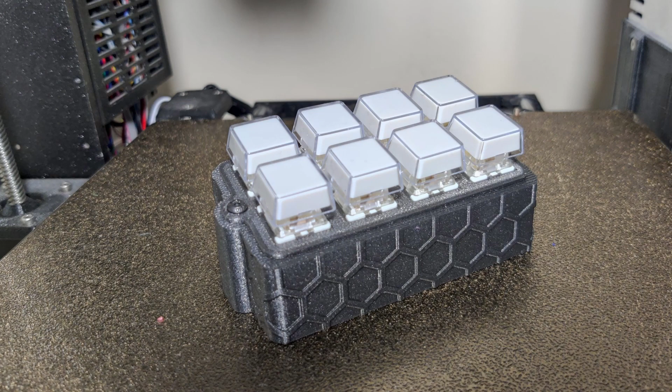Which is when I remembered that recently there was a macro keyboard project in one of the Alien 3D subscription boxes that I had not built yet. If you aren't aware of the Alien 3D box, it's an awesome monthly box that comes in a couple different varieties. I get the full Alien box, which includes 4 different filament samples, a gadget or a tool, and non-3D printed parts to be used in a 3D printing project. And typically there's one big mothership prize that is given out to a random subscriber each month.

This project was included in the September 2021 UFO box. That month, the mothership prize was a full camera. The 4 filament samples just happen to be all from VO3D. This isn't typical to have them all from the same manufacturer. The bonus accessory was a silicone magnetic soldering mat and our project, the macro keyboard.

At the bottom of the project description are 2 links, one to the modified case files that will print from Printables and another to the assembly instructions.

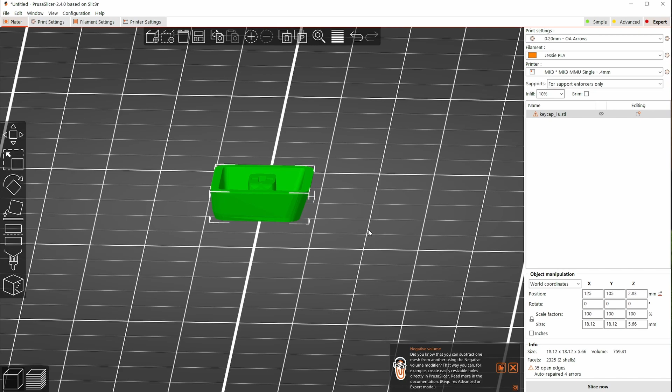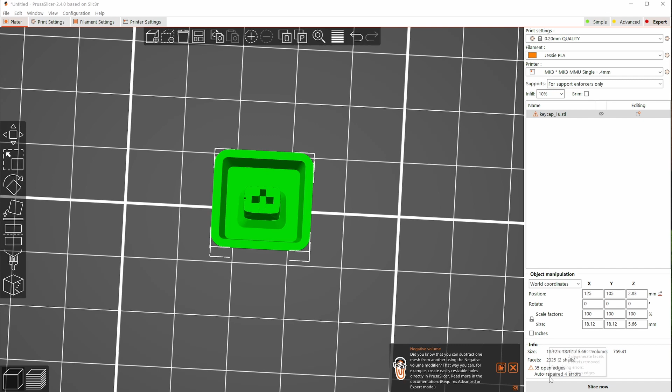Note that this keycap came in with this error over here. PrusaSlicer found 35 open edges and has gone ahead and auto-repaired them. But we can go ahead and make that a little bit more permanent by right-clicking and clicking Fix through Netfabb.

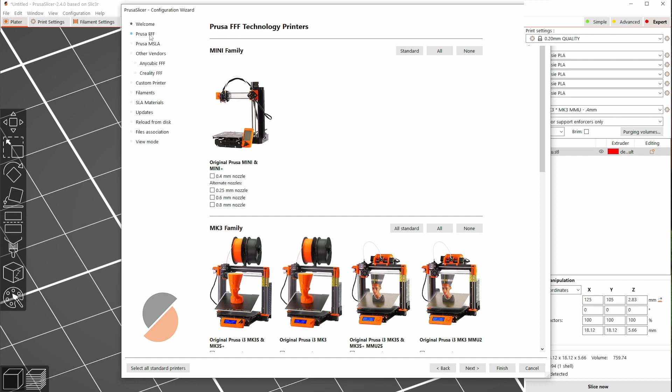I'm going to go ahead and click the printer configuration over to use the MMU2 unit. This can easily be added pre-configured from the configuration wizard inside the slicer. This is primarily because it's going to be a lot easier while we're first building these out to just go ahead and use the pre-configuration. When it comes time to print, I'll swing back around and show how to print these without an MMU on any printer that supports the M600 pause function.

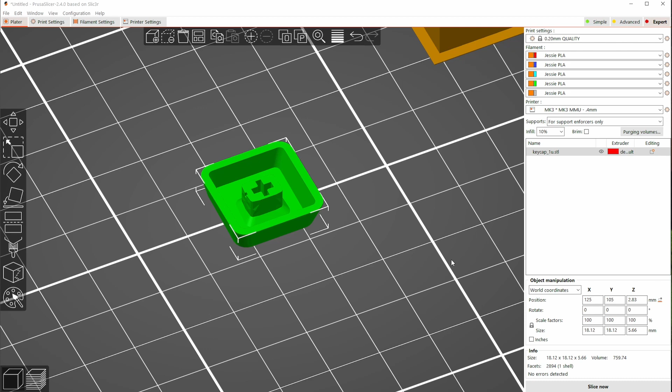Our first keycap is going to be for record. It's just going to have a circle. This one's pretty easy. We can use the add part feature to add a circle, or in this case a cylinder, to our existing keycap.

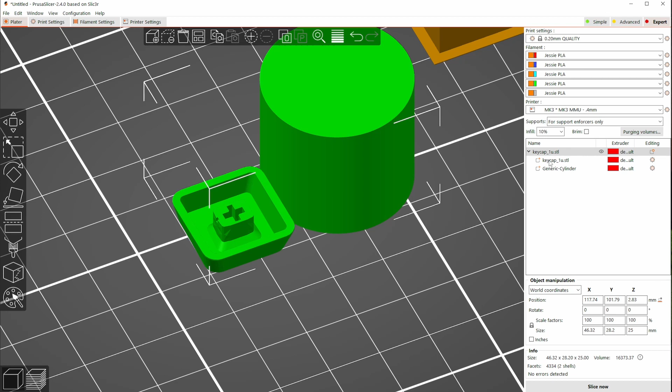Notice how it's taken the keycap and the cylinder and grouped them together. This way, when I'm working with the group, I can move them together, but I also can address each one individually. So in this case, we need to make our cylinder dramatically smaller.

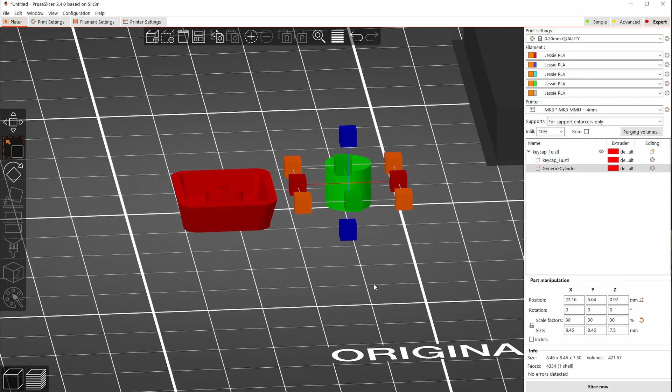When we scale things with the outer handles in PrusaSlicer, it scales from the center, so it's floating up in the air. You can use the drop to bed icon down here to drop it down and settle it on the bed. It's a lot easier to flip this over and look from the bottom side to get our sizing.

And when we look back over at the coordinate system over here, when we click on the main keycap file, that's the coordinates for the build plate. We click on the keycap file itself, that's its position relative to the group, and the same thing when we click on the cylinder. So essentially, because the keycap file is the primary file, we click on the cylinder here and we can see its relationship to that file.

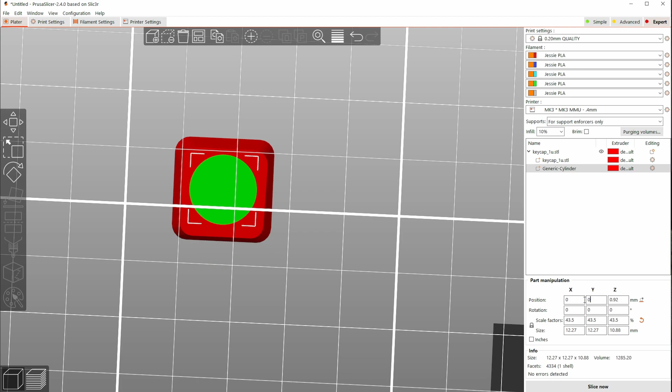So we can change our X position to 0 to center it in the X axis, and we can do the same thing for Y. Now, because we've got that flared skirt on there, it's centering to the widest point, which is not the part that we're going to see. So I'm going to move this over just a little bit so we can visually center it to the center part of the top of the keycap.

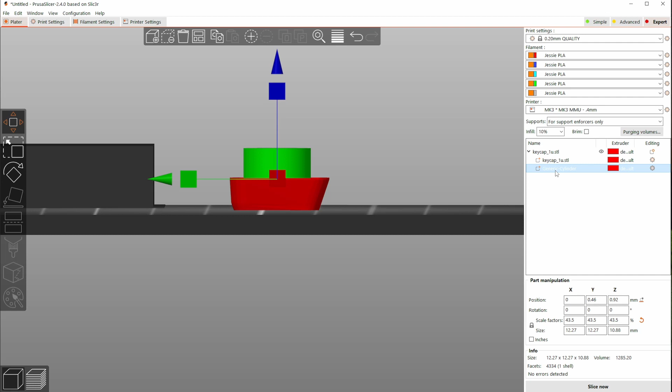Now when we move that, it actually moved our keycap up so we can drop it down to the bed. Our cylinder is still way too tall. I'm going to print these at a 0.2 millimeter layer height, and I only want to do 2 layers. So it will be 0.4 millimeters.

Notice that I forgot to unlock the scale factor, so it scaled the whole thing. We'll undo, unlock, change to 0.4, and drop to the bed.

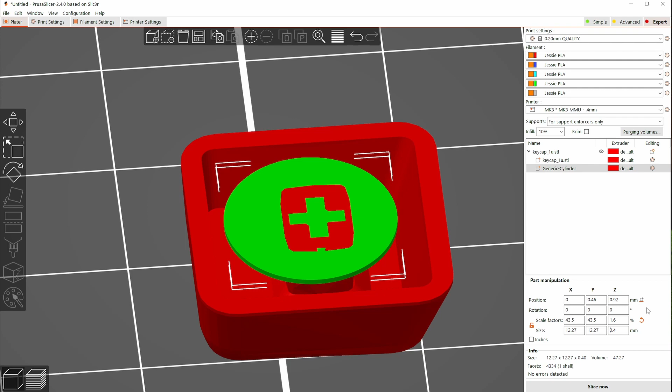Now it looks really nice until we click off of it and we realize that we're printing with the same filament. I'm going to select the cylinder and tell it to print with the second extruder.

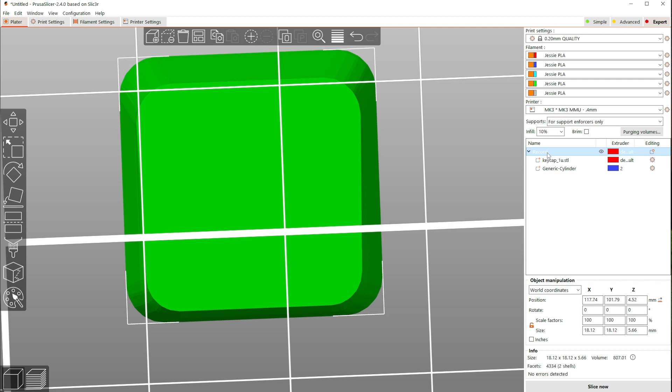Our first keycap is done. Another thing we can do in here is come over and double click on that group name and rename it so we can keep our groups separate, because we're going to have 8 keycap files in here eventually. We could copy and paste this group and delete the cylinder, but it's a little bit easier just to bring in another file.

Now notice that it's coming back with an error. So if we duplicated this group and deleted it, we wouldn't have to fix this through Netfabb.

Now I said this was going to be just done with PrusaSlicer, but I'm also going to give you another little tip here. If you happen to be working on the Windows platform, you can open up a file in the Windows 3D Builder that's built into Windows 10.

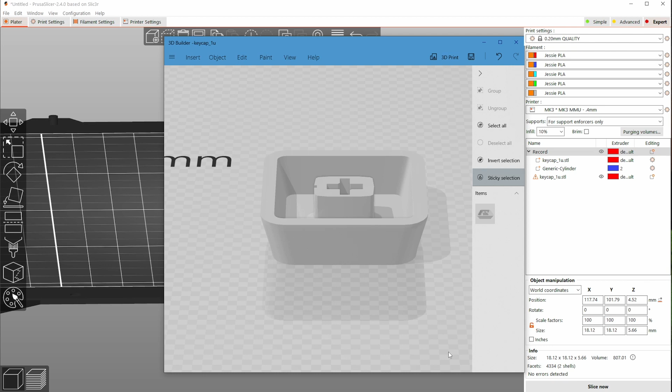Import the model, and it will find any errors and want to correct them, and then we can save our file back as an STL, and when we bring that file back in, it's fixed.

Now another option we could have done is, once we right-clicked and fixed this through Netfabb, we could have gone up underneath the file, export, and exported the plate as an STL. But we can't export an individual file.

But if we'd have brought just the keycap into PrusaSlicer, fixed it as our very first step, and then saved the plate back as an STL file, then we could have had that file come back in fixed each time.

But when I run into a situation like this, it's usually just easier for me to double click on the file inside Windows Explorer, fix it through 3D Builder, and then bring them in. It's all personal preference. If you're using a Macintosh, I'm sorry.

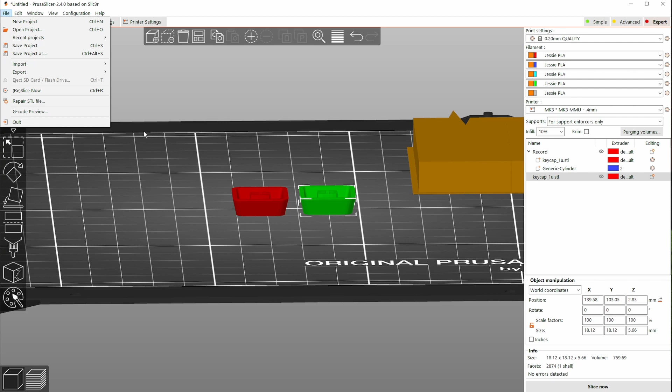I don't know any other way to fix it there. I know there's got to be some other tools, but fixing this situation through PrusaSlicer will work on all platforms, Windows, Linux, and Macintosh. Our next keycap is going to be the pause button.

Now there's several different ways we could illustrate or convey the idea of pause. I could use the cylinder and add a couple boxes to it, but I'd like to share another cool resource with you. Font Awesome is a website with awesome icons and logos as font resources for use on the web. Luckily for us, the icons are also available as SVG files.

So I'm going to search for pause. These icons come in two different varieties: free versions and pro versions that you have to pay for. For this, I'm going to use the free versions.

However, if you happen to use these icons for anything that you share with the rest of the world or you make money off of, I would highly advise that you go ahead and look at the pro versions.

I like this circle one with the bars in the middle. I'm going to go ahead and collapse this to clean things up just a hair. We can see this icon laid out in a couple different patterns and backgrounds, but we need the SVG file.

And that is at this link right here. And again, we've got some terms of service and talk about licensing, and we'll save that SVG file. Sadly, we don't have the ability to bring an SVG file directly into PrusaSlicer to work with.

So, feature request? Luckily, I found this cool website called SVG to STL that conveniently will allow us to take our SVG file, import it, and upload it, convert it.

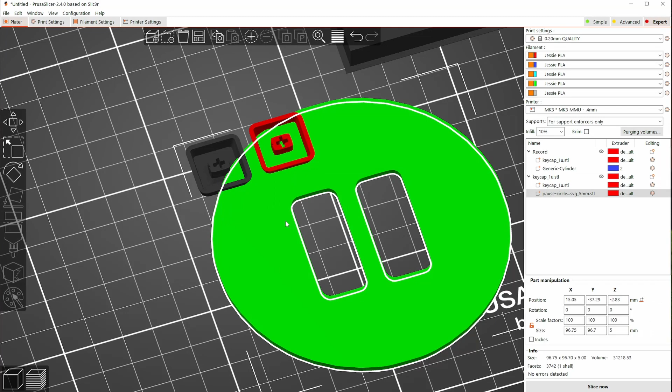Similar process as before. We're going to right click and go to add part. This time, instead of selecting a cylinder, we're going to use load. We'll grab that STL file and load it in, then scale it down and position it.

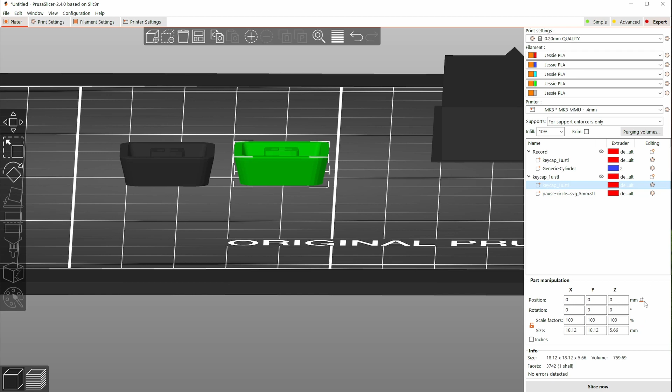For continuity, I'm going to click over and look at my other cylinder, which was 12.27, 0.4 high, drop, make sure they're down, and set to extruder 2.

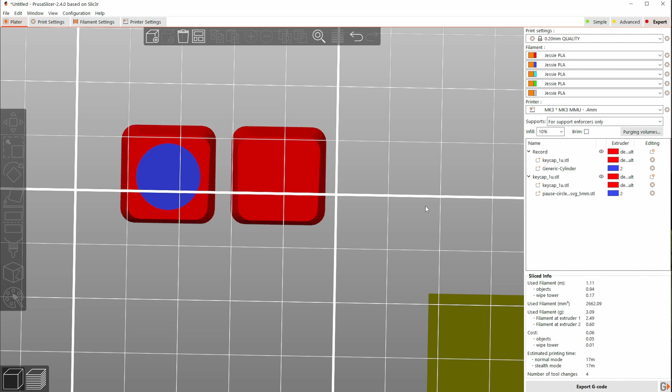Sometimes you'll see a little bit of weirdness here. I've noticed if you just slice the file, which this looks good, and kick back, sometimes it'll be all right. But we did slice it and we saw that it was all good to go. So that's just a little bit of a visual oddity there, but it is good to go.

Our third button is going to be for studio mode. Studio mode is more for live streaming, where it can be used for transitions. I haven't really done any live streaming yet, but it's something I aspire to.

So we're going to run through that same process again, and this time I'm thinking a monitor type of image will work. I think this one that says TV will be fine.

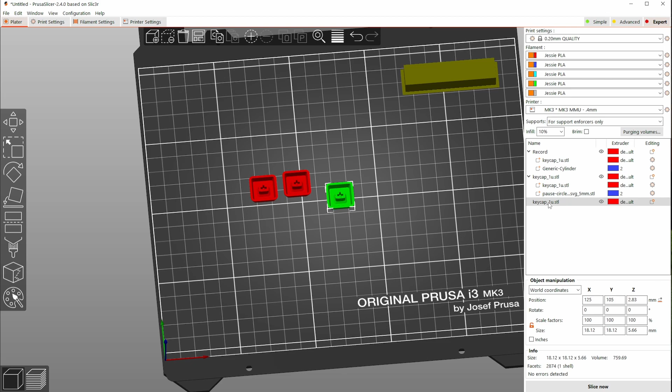I'm going to move our keycaps over out of the way a little bit, get some room, bring that file back in. Notice there's no error this time because we repaired it with 3D Builder. Same thing, we're going to add a part by loading it.

Now in the bottom row of my keys, I'm actually using this particular icon for my monitor source key. So I am going to go ahead and set this one up and then duplicate it, and we'll modify the duplicate to make our studio mode key.

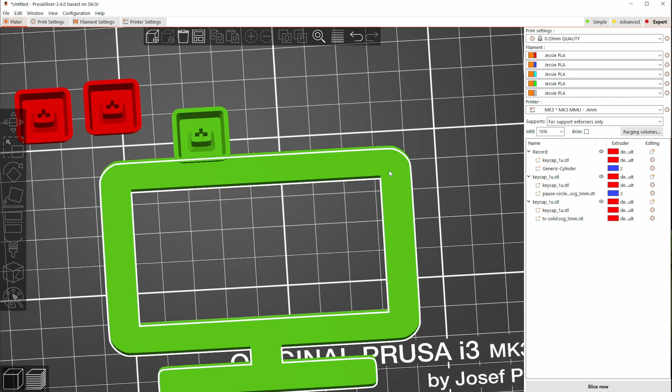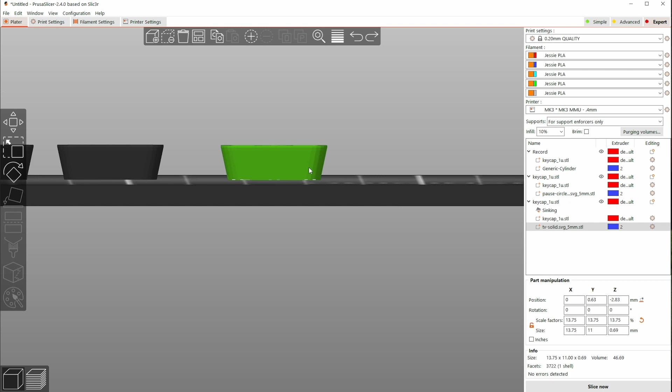And we'll set that to our second extruder as well. Before I drop this to the build plate, notice this icon right here now that says sinking. That is actually telling us that our keycap is sitting on the build plate, and part of our group, in this case the SVG STL that we just imported, is below the build plate.

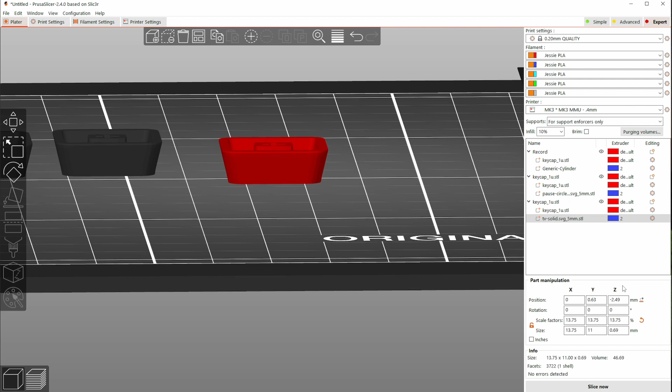This is something new in PrusaSlicer 2.4. Originally you could never drop anything below the build plate like you could in Cura. Now you can, and there's a warning telling us that that's what's happening. Dropping that TV icon to the build plate makes it go away.

We will set that to 0.4 millimeters and drop it to the build plate. Slice, and excellent. I mentioned that we're going to go ahead and use this same base icon for the studio mode and for my main screen keycap.

I could click this plus button up here and I could add another instance of it, but they're tied together. So if I alter one of them, it will alter both of them. So that's not going to work.

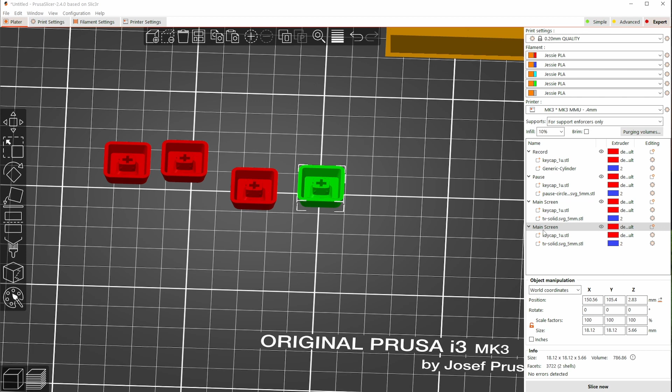What we need to do is just a regular copy and paste, and that can be a Control-C, Control-V, or we can use the icons up here in the toolbar. I'll go ahead and rename this one Studio just so we don't get them confused.

And now what we're going to do is we're going to combine the first two techniques. We already have an icon loaded, but now we need to add a box. I'm going to be efficient and go ahead and change this to 0.4 millimeters high now, get that out of the way, and change it to Extruder 2.

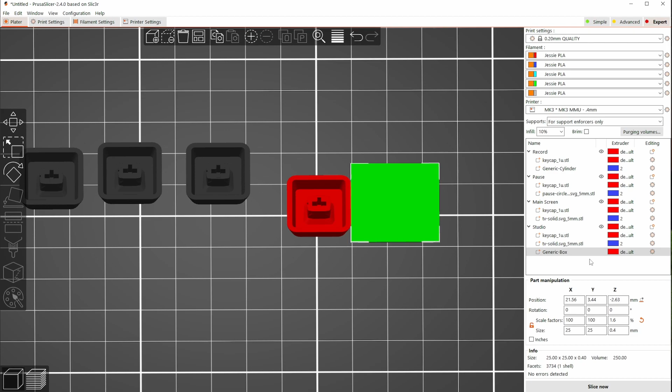So go ahead and grab that and scale it down, and I'm looking for that to be at the same width as the other parts. I think that's about right. And now we need to get our height. Oops, see, I grabbed the whole thing there. I need just the box.

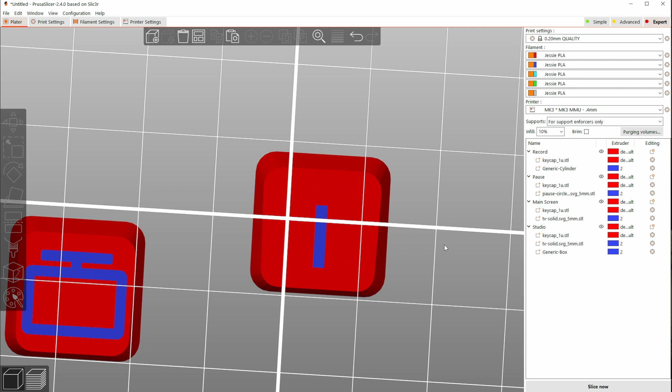I think that looks right. Let's double check. Set that box to 0. It's at 0.05, so now we're exactly there. And slice. To keep the video as short as possible, I'm going to skip showing how to do the microphone, because it's exactly the same way that we did the pause button.

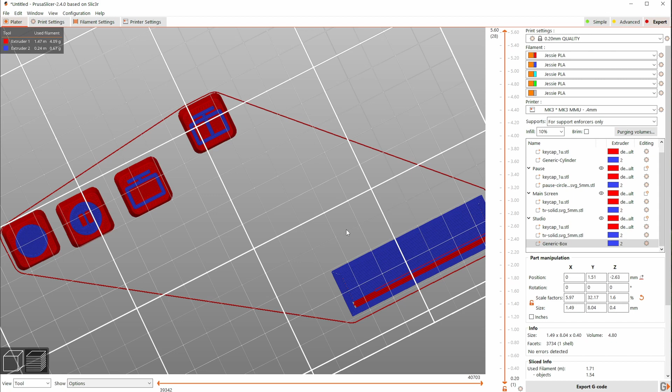I'm also going to skip showing you how I do the 7th button, which is the little popsicle person, which will be my webcam pointing directly at me. So I'm going to skip ahead and do those off camera, but then we're going to circle back and combine two different keycaps again. So now I have the 6 keycaps done, and we can go ahead and slice them and look at the preview by sliding all the way down.

See that first layer, got my microphone. For the record, when I searched on Font Awesome, this icon is called User. We can see our first layer looks good, our second layer looks good, and then our third layer is solid red. So that means all of our icons are 0.4 millimeters high.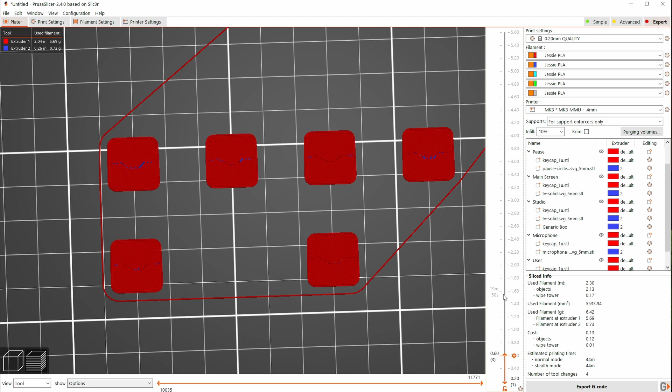Now we're going to take care of this 6th icon, which is my webcam inset in the bottom right hand corner of my primary monitor. To do that, we're going to combine these two icons right here.

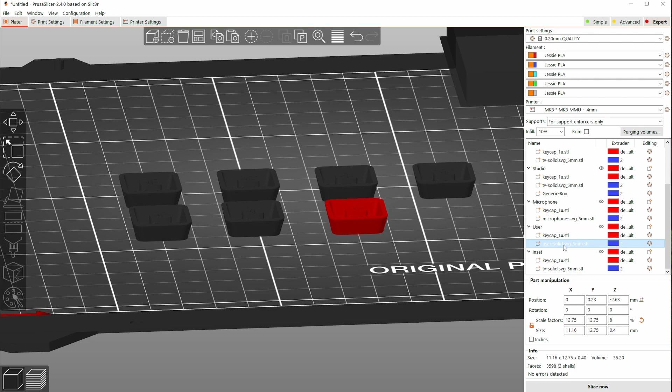So I'm going to copy and paste my main screen, I call it Inset. Then I'm going to go over to my user. I'm going to copy just that STL. Then click on my Inset and hit paste. And that drops it into that same grouping.

When we slice, we can see they're together. Of course, my user icon is too large, so we're going to have to scale it down.

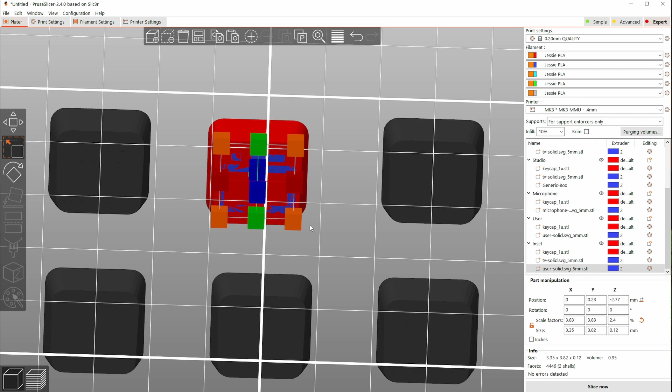There we go, so we'll take a look at all of them. Those look great. Now for our final one, this is going to be for an auxiliary camera, for example something like one mounted overhead and pointing down.

It's going to use the same process that we just used, taking 3 separate STL files and combining them together. But there's going to be a slight twist. Let me put this together for you real fast and I'll show you.

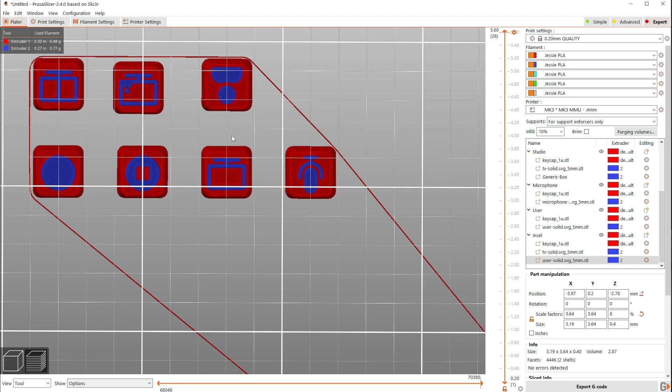I've gone ahead and assembled all the parts of this keycap now. We've got the keycap, we've got a down-facing arrow, and I've got my camera. However, I still have them all set to the default extruder so we can illustrate something. The order in which things are placed is important.

I want the camera part to print in a different color and the arrow to print in the same color as the keycap, much like a similar combination that we have now. So I'm going to change that to extruder 2. It looks good here in my preview, so if we slice the file, we can see that the arrow is not being rendered. So let's change the order.

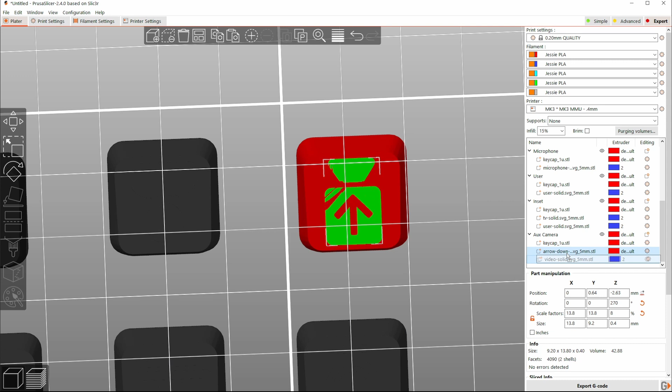Put the arrow below and the video on top. And now when we slice, we'll see that that arrow is where we want it to be.

So if we look at the order in which things are stacked, you can see that it's kind of a bottom-up stacking order. The arrow is the lowest thing in our list, so it's got precedent, and then the video camera, and then the keycap. So when you're putting multiple things together, just be mindful of the order that they're in, just in case you get a result that you're not expecting.

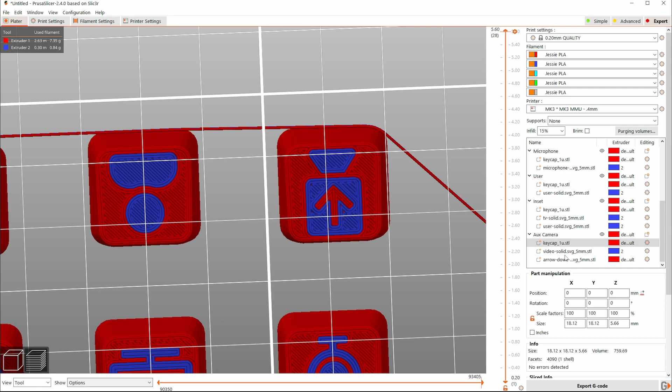Scroll out here and take a look. Here's our first layer, our second layer, and then our third layer, and everything prints on up from there.

The slicer is already set up to go ahead and use the MMU on my MK3. But let's go ahead and take a look at a couple little things here.

We can see up in the top left corner and down here in the bottom right that we can see how much material is going to be used, how much material is going to go into the wipe tower, extruder 1, extruder 2, the grams, the weight. If we've put in how much the filament costs, it can even do some rough calculations on how much our print will cost, and it will tell us how long it's going to take to print.

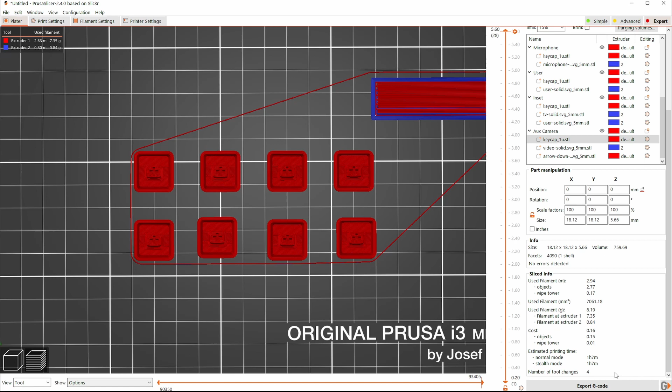Now with these, one of the things to pay attention to is this number of tool changes here. It's only doing swaps on those first 2 layers, and then it's that same color all the way out.

And if we want to get an idea exactly how this is going to print, we can drag this slider back and forth, and we can see it's going to print that main color, and it's going to come back and fill it in.

Something cool that's been added in PrusaSlicer 2.4 is the G-code output on the left-hand side here. As we slide this, we can see those changing.

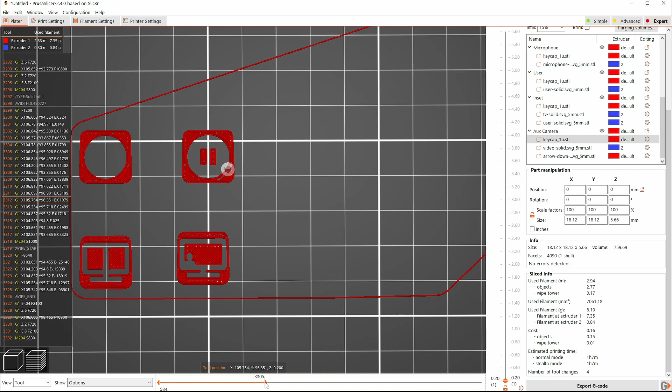Now, as we look at this go by, we can see in here it telling us information like when it's changing objects, wipe starts, wipe ends, its layer heights, and when it starts its wipe tower and its specs for the wipe tower, and when this tool change takes place.

It's going from PLA to PLA, and when it does an unload to pull one filament out and stick it back in. Now with the MMU, that's all automated, so we really don't have to worry too much about that. But when we go for the Ender, it's going to be important to pay attention to those.

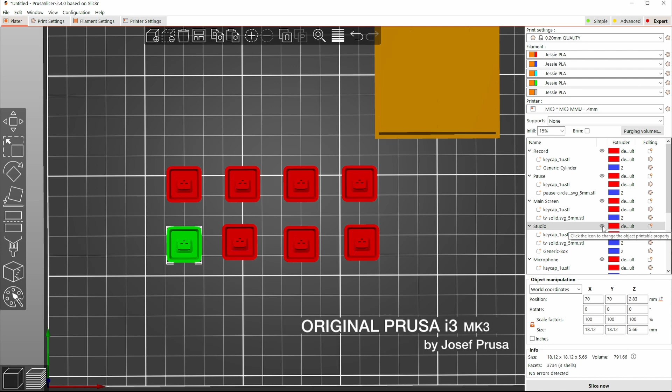Now for this print, what I'm going to do is I'm only going to print the top set of the keycaps. I'm going to print the bottom set without the MMU. So I can select my model and click this eye icon, and it will tell the slicer not to slice those models and ignore them.

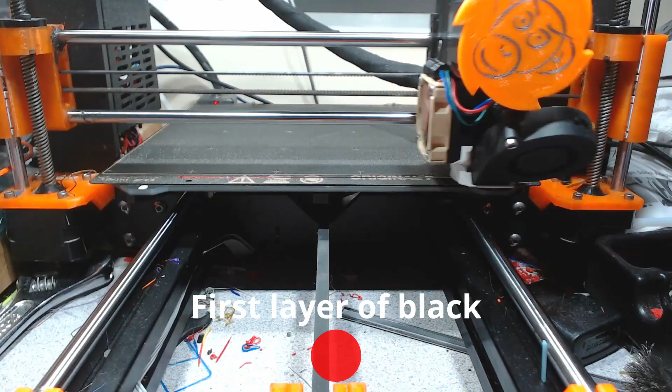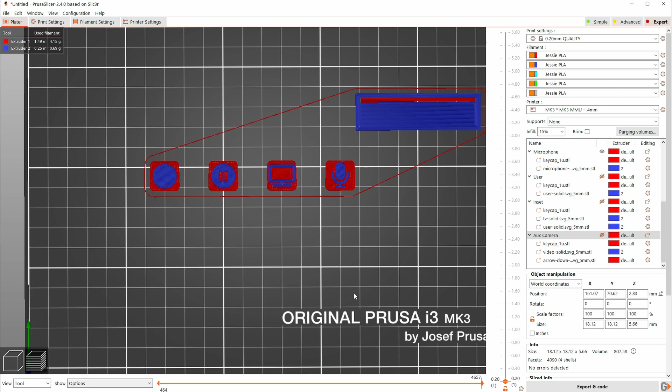So we're going to print these on the MMU, and then we'll print the others without it. To print these without using an MMU and doing manual filament changes, we're using an M600 command. Let's go ahead and turn this top row off.

And we'll turn on the bottom row that we're going to print. And we're going to change our printer from the MK3 with the MMU. I'm going to grab my Ender 3. Now the Ender 3 does not have any multicolor capabilities, so we're going to have to add it.

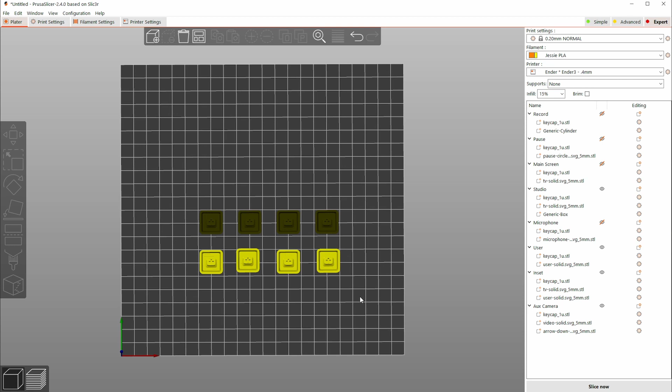First thing we're going to do is go into our printer settings and lie to it, telling it it has 2 extruders. Once we've done that, we can go to the left hand side and select our extruders and change our preview color. I'm going to be printing these in black and white.

While we're here, we need to go into the custom G-code section, and this is what makes this work. We're going to come down to where it says Tool Change G-code, and we're going to type in M600. We already have that down on the color change, but by telling it it has an MMU unit and automating the swaps, the slicer is going to consider those to be tool changes.

Now we can go to our print settings, and we're going to go to multiple extruders, and we're going to make sure that wipe tower enable is turned off.

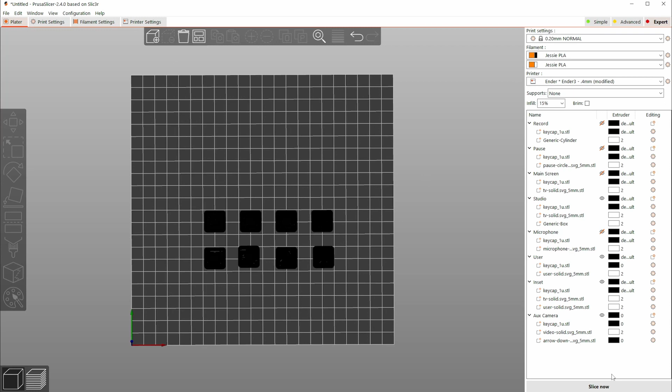Now when we go back and slice our file, we'll see just this bottom row of icons are black and white, but when we drag through this bottom layer, we'll go right to where it changes from the black to the white.

You can use your mouse wheel on this also to get real fine grained, and right where it changes over, we can come over here in this G-code and we can see M600 right there.

That's going to make the printer pause, move the head to the side, and eject the filament and ask for a new filament. Depending on how your firmware is configured, your printer may go to a different location than another printer, and the automated process for unloading and reloading filament may be a little different. It may go ahead and eject the filament, or you may have to manually eject it. But once that filament is swapped, it'll come back and begin printing.

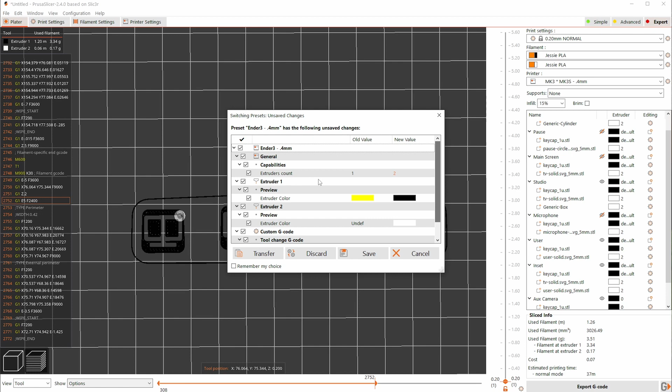Now, we can do the exact same thing if you happen to have an MK3, but you don't have an MMU. I can use a stock regular MK3 profile. Now when I change over, it's asking about changing some of these settings I made, and I'm just going to hit discard. So we'll go into printer settings again, and we'll lie and say we have 2 extruders.

We'll do our custom G-code because that's the next thing in the list - tool change, M600, extruders, black, white. Now because this is using a profile for the MK3 that could use an MMU, when we said there were multiple extruders, it automatically turned that wipe tower on. So we need to turn that wipe tower off.

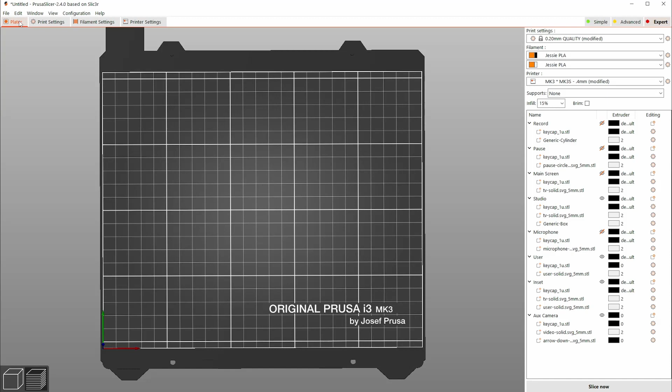Other than that, same thing as with the Ender. We'll slice, take a look at our first layer, drag back, we'll see our M600, and we're good to go there. So now let's see these print on these 2 printers.

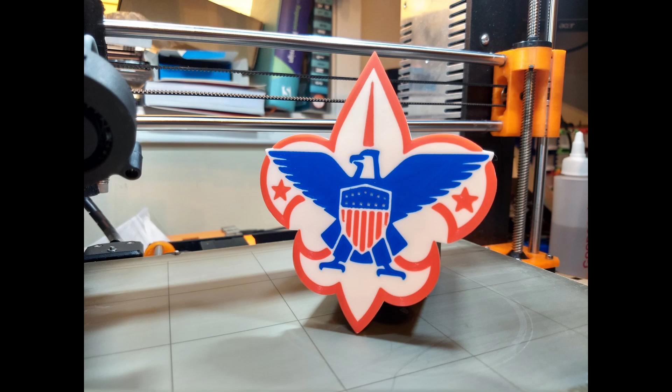Here are a couple more examples of prints that I've done using just M600 before I got an MMU2. This is a 3-color receiver cover that I made for my truck. And these maker coins were printed for the 2020 Midwest RepRap Festival. Sadly, I never got to hand them out because the festival was canceled.